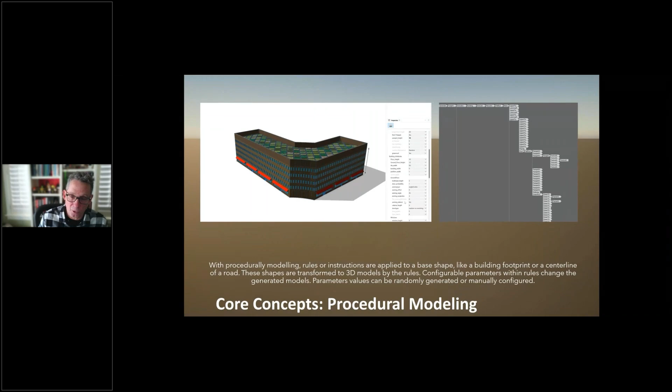We also run through what we call our LODs. LOD 1 is just simple masses. LOD 2, we're starting to segment out the building roof forms to get different shapes. LOD 2.5, we're adding things like spires and mechanical units—things that bring a little bit of realism, especially from an aerial perspective.

LOD 3 is just texture geometry, like the cereal box, where we sort of texture-map sides of buildings. And at LOD 4, we introduce physics-based materials—it's really 3D construction. You can see the light reflecting off these buildings because the glass is behaving like glass, since in CityEngine we're constructing actual glass windows. You can see the difference: one is very flat, just taking a texture and applying it to these objects, while the other is a full reconstruction of those buildings.

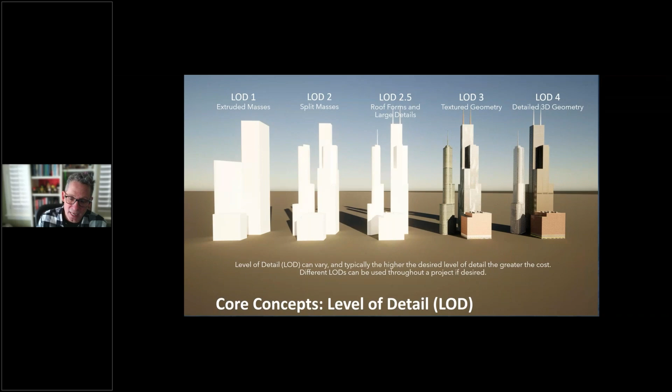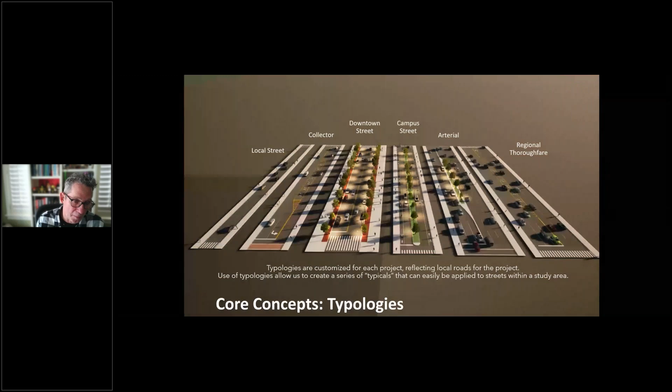And then if we have to, we can do some manual modeling—for that we're using Rhino, Blender, SketchUp, whatever we have to do to get it done. But the other thing we show them is that for streets, we're not going to make 3D models of every single street within the community. So we take a typology approach: we identify how many different types of streets exist within that community, then build out the typologies that we apply broadly to the study area or city.

And once they're on board with that is when we jump in. We had cross sections.

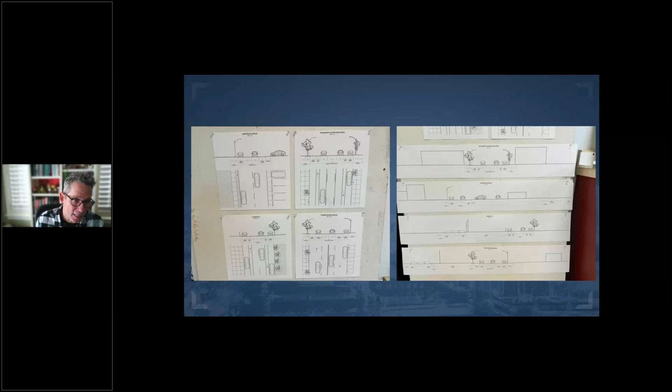There was a neighborhood planning group that had done a lot of work, and so they identified with the streets what they wanted it to look like. And so this was a video we put together for our staff, kind of a staff brown bag, to show the other people in Houseal Lavigne what we were up to.

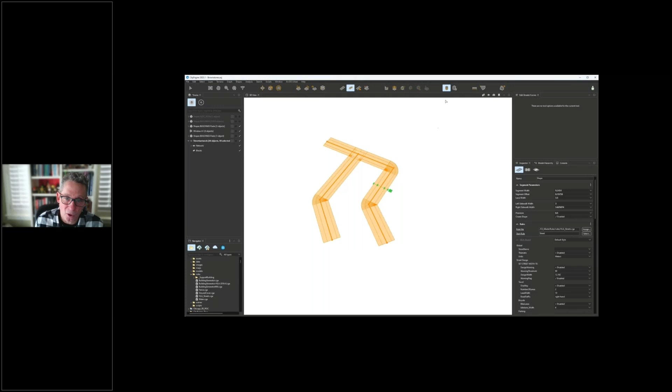But we took those streets and we created typologies for them. This was a rule I showed, it would have been my very first CityEngine user meeting, where we created what I think everyone knows as the complete street rule. We sort of call this one incomplete streets. We find ourselves modeling these types of streets a little more often than we do regular streets.

One of the things we added, you'll see I'm highlighting the design width. It's very common for planners to want to put 10 pounds of sugar in a 5-pound bag. By that, it's like, we want a bike lane, we want on-street parking, we want 20-foot sidewalks, and the right-of-way is only so big.

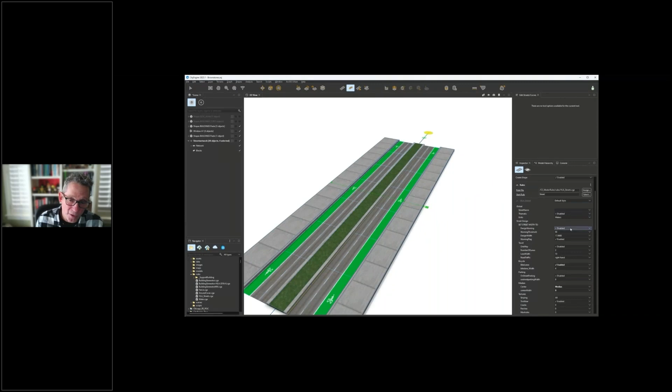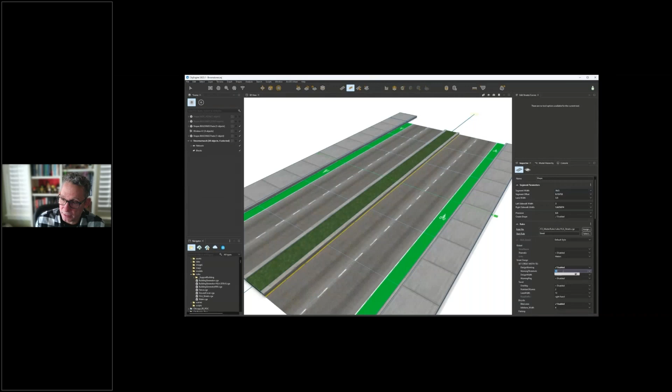So what we did is we created this design warning where if we're trying to over-design a road by adding too many amenities, it'll tell us if we've hit that threshold and it just turns it red. That tells us it's not going to be a realistic scale. So what we have to do is either increase the width of the street to meet that threshold or not. You can see the design width in the bottom right there should have been 17 meters.

By the way, I think all of this is going away with the introduction of the new streets. That's coming up later. I've had a chance to play with that - it's a huge improvement. I think it's going to change a lot of our workflows.

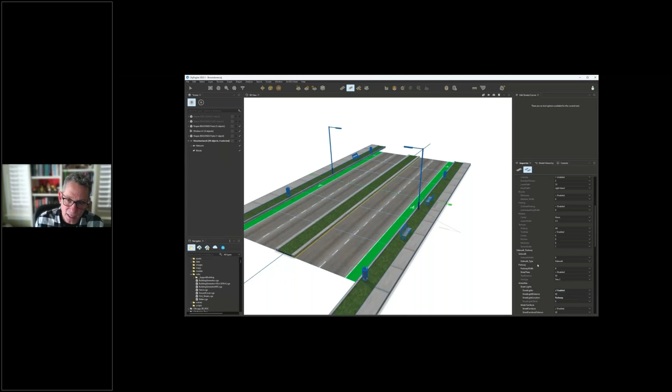And then within that street rule too, we introduced things like parkway furniture, trash cans, and trees, and give our clients the ability to kind of space these out. We're doing intra and inter occlusion queries, so if a street light is sitting next to a tree or on top of a bench, one of them gets removed. That was a real nice addition to the CGA grammar a few years ago.

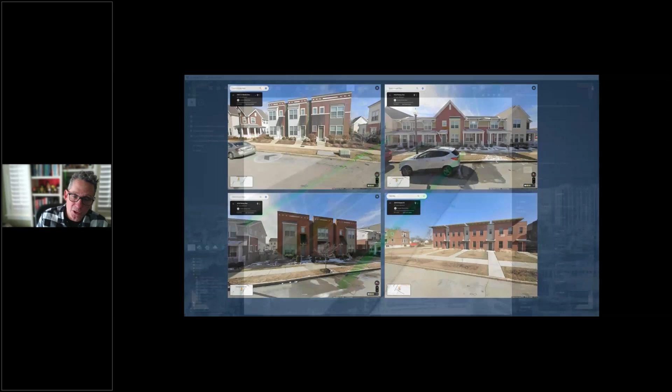We also asked them for pictures of development that they liked. You saw those brownstones that were torn down or burned out. So we said, what are some good examples within the city? They gave us a bunch of street addresses using Street View, and we just sort of captured these. We then went to St. Louis and took photographs, and then we created some CGA rules to model the brownstones.

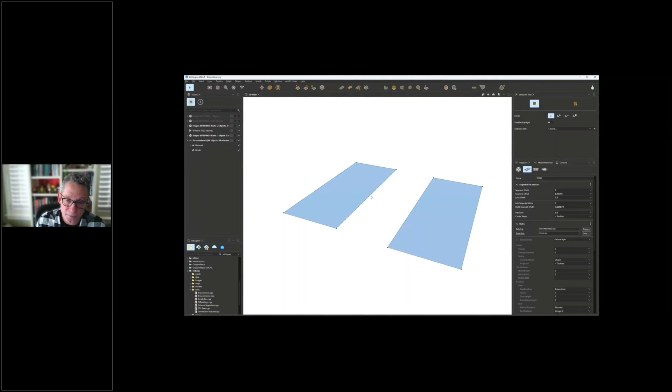You saw the condition of those initial brownstones - boarded up windows, broken windows. So we created a CGA rule to create these dilapidated brownstones. There's a simple flag in here for whether or not it's dilapidated. If I change it to disabled, we clean up the dirt on the texture and rehab the windows, to give an idea of what these would look like if they were rehabbed.

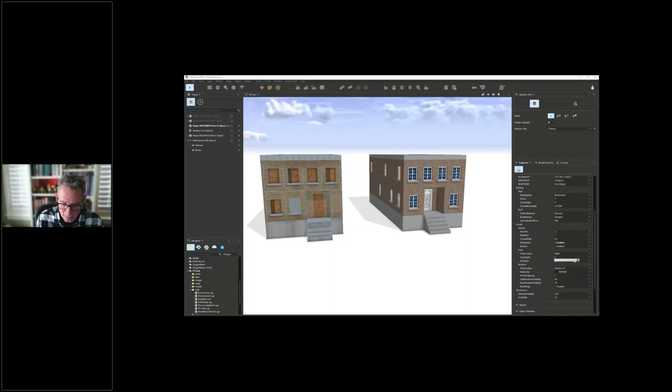With this investment coming into the neighborhood, the thought is new development would come and people would be reinvesting in their property. So what they wanted was a before and after. We had to build a digital twin of the St. Louis neighborhood as it exists today with these disinvested properties, and then show what the neighborhood could look like with these catalytic projects.

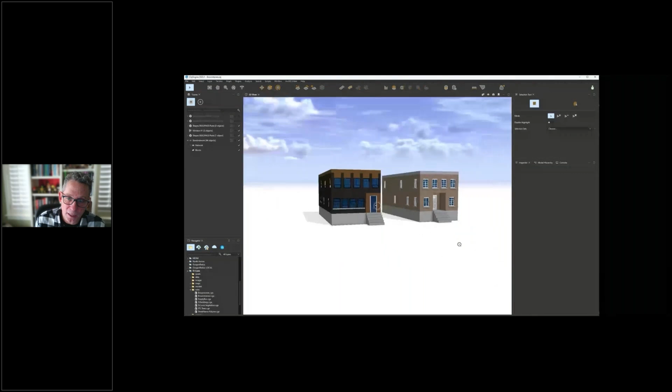So for us, we had to build the brownstones in their current shape, and then what they would look like rehabbed. And then if someone did a new brownstone, what would be a modern interpretation of that existing St. Louis style - just resetting some seeds, the randomness in the rule, to create these different models.

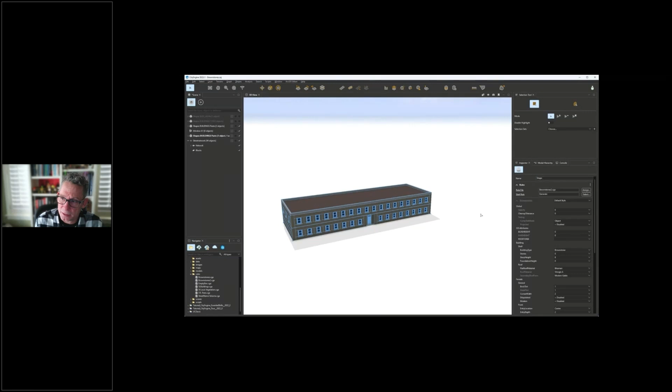We did a similar approach to row houses. Some of the photos they gave us were row houses, so this same rule we can turn into a townhome. It adds some unit articulation, and even along here, a lot of different random building forms and styles - all influenced by the precedents given to us by our client. Our job was simply to turn those images into CGA.

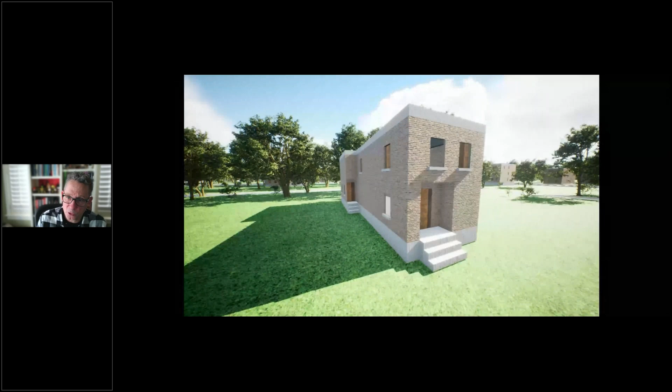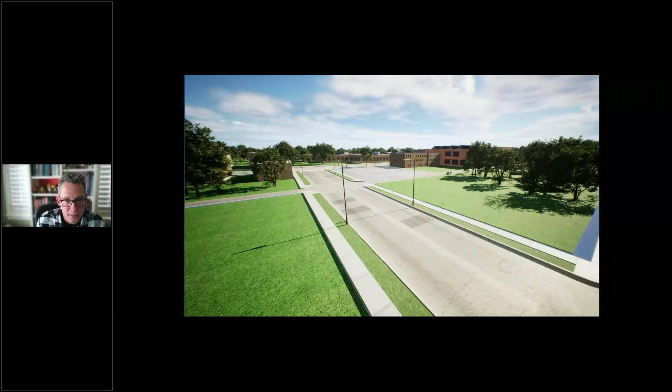So inside of the Unreal Engine, all this was brought in to provide interactivity. Here's what a brownstone would look like, and here it is rehabbed. This looks like heading towards MLK Boulevard, where we're adding multifamily.

So these are before or afters. I mentioned 4 catalytic projects.

You have the Sumner High School. I don't know if I have the numbers right, but I think it has a capacity for 1,000 students, and I think right now their enrollment is about 150. So because of all the disinvestment in the neighborhood, there's not a lot of kids, but it's a historic Northside high school. A lot of famous St. Louis people have come from here, from the likes of Tina Turner, Arthur Ashe, and the Arthur Ashe Foundation was giving Sumner High School money to redo their tennis facility.

Arthur Ashe is an African-American tennis player, and his foundation was giving the high school money to redo their tennis courts.

The Killark site was an old manufacturing facility. This was something they were turning into a learning facility for the community to train them for high-tech jobs. They were going to call this the Monarch Learning Center, and there's a little bit more on that in a bit.

You have the Marshall School, which is John Marshall, one of the founding members of the U.S. Supreme Court. There was a developer that wanted to turn this building into condos. And then lastly, we have Ranken Technical College here that won a very competitive grant to do advanced manufacturing on the remainder of this site.

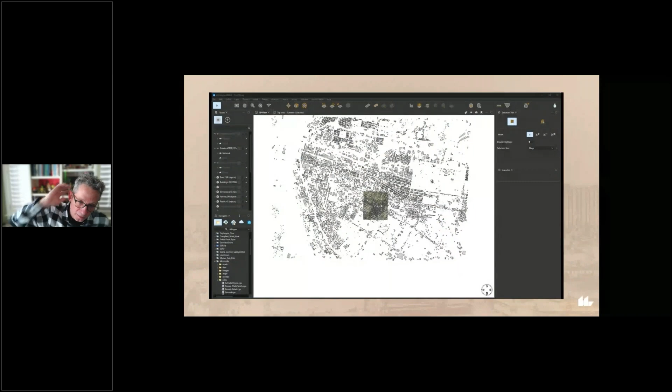So inside of CityEngine, you'll start seeing kind of all these rules put to action. I mentioned we're going to fly a camera through. One of the things we thought of as we were working on this was we knew one of the facilities was called the Monarch Learning Center, and we thought it would be good, instead of a camera or a pedestrian, maybe we turn the playable avatar into a butterfly.

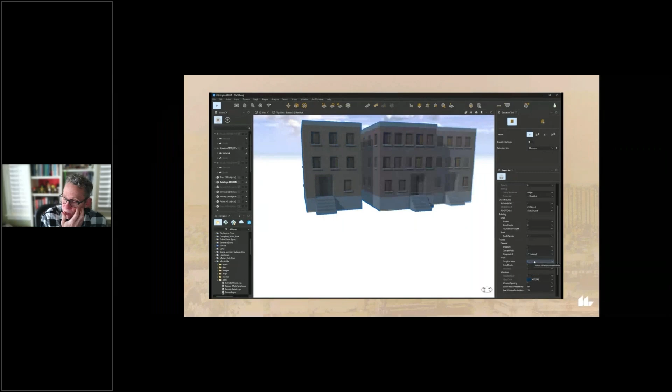And so what we did is we attached essentially a butterfly to the camera controller in the Unreal Engine, and a butterfly is going to fly through the city. And we built a giant collision sphere around the butterfly, and as the butterfly intersects with parcels is when we activate the change.

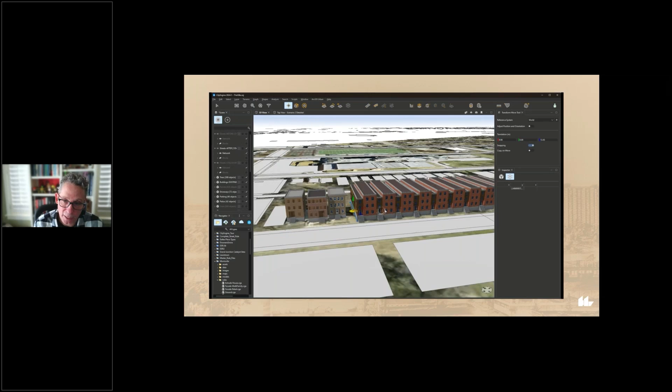So inside of CityEngine, you can see how we kind of dropped these new developments in and applied the rules. And if I just kind of generate it all, so this is the entire neighborhood. This is over by Sumner High School.

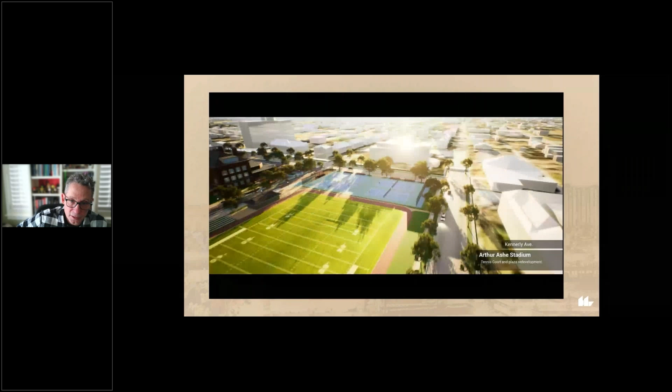And then this is the video that we delivered to the mayor for her State of the City. So there's the Arthur Ashe tennis, and here's our butterfly. And again, this butterfly has this giant collision sphere around it. When it intersects with any vacant parcel or parcel that's been disinvested, we change the mesh.

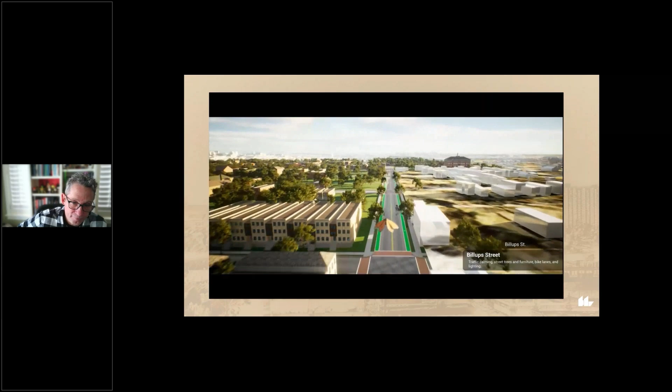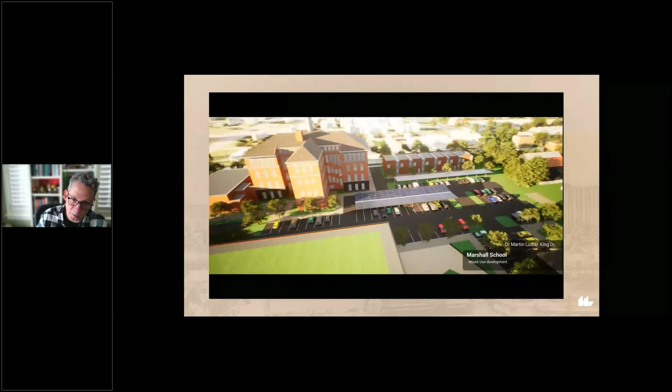Little trick we used on these townhomes, we basically scaled them to zero height, so they're flat as a pancake, and we tuck them underground. And as the butterfly hits that parcel, we raise them up 10 centimeters so they're above the grass, and then we expand their scale back to 100%. And so it gives this appearance that they're kind of growing out of the ground, but it's really just a scaling effect.

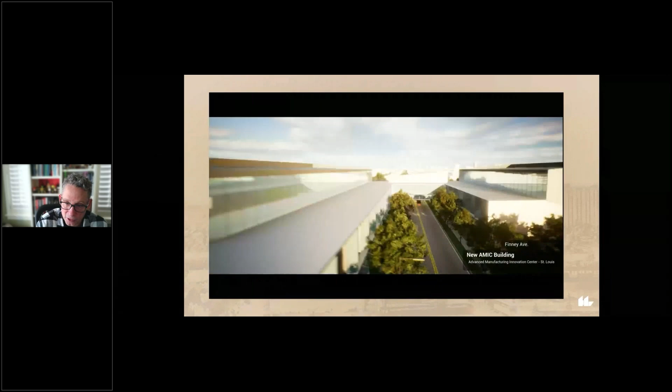So this is the AMIC building, that advanced manufacturing facility that they're building with the grant money. And then lastly here, the butterfly is going to fly down MLK Boulevard, heading towards the Monarch Learning Facility.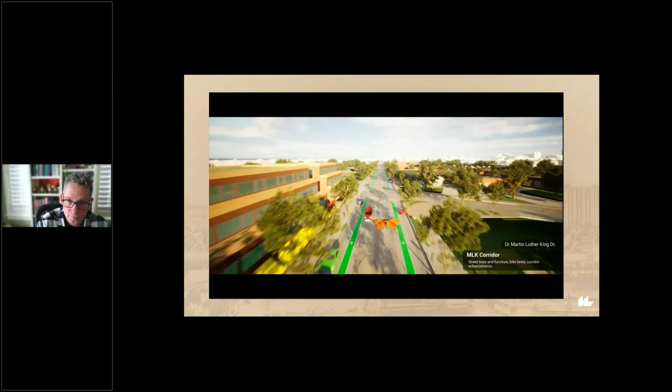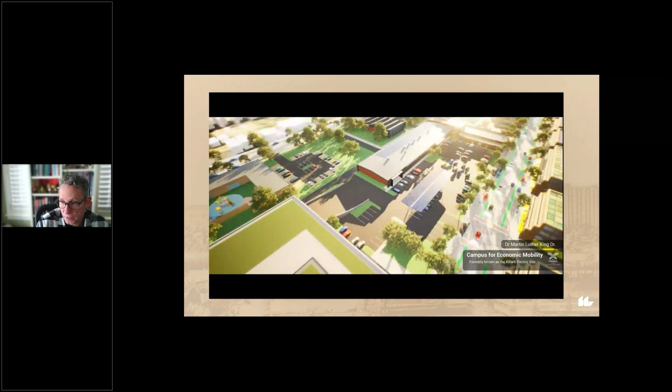And that's the last site. And then the butterfly will sort of return home, passing through the rest of the neighborhood.

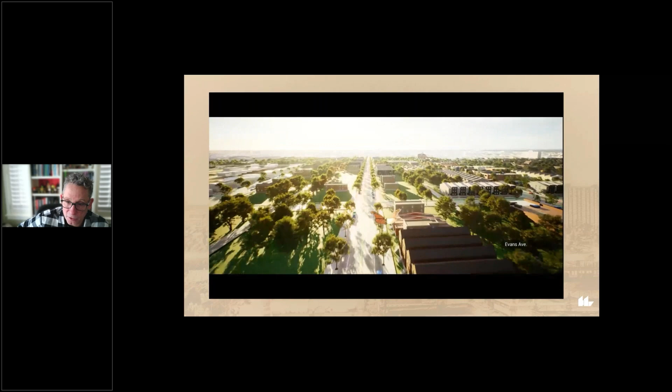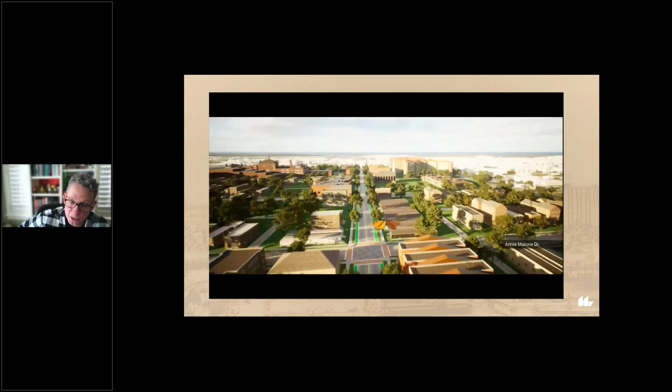So this was a big success. The mayor unveiled it at her State of the City presentation last spring. We've been in continuous contact with the city. They're thrilled. There's a few more pilot projects they want us to tackle before they move on to a citywide 3D model with this capability, so they're able to kind of see what the north side is going to look like as the economic justice master plan takes hold.